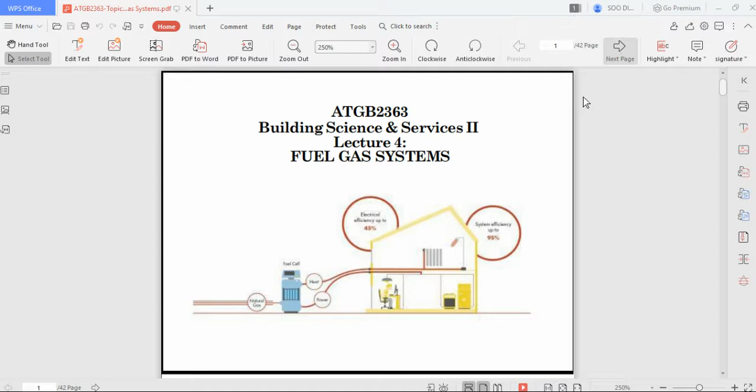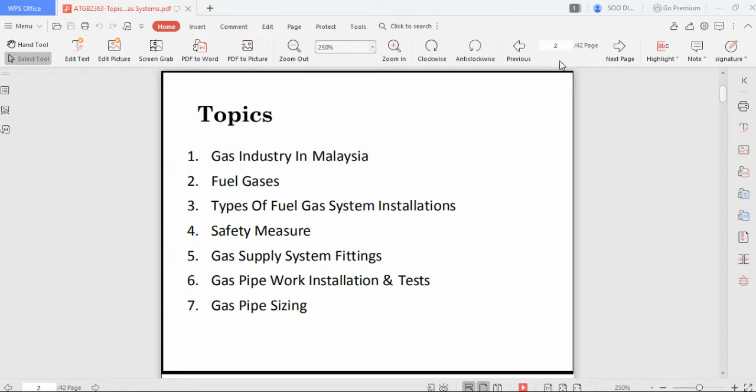Okay, so this is a fuel gas system. Previously we have gone through the gas industry in Malaysia one and two, which is a fuel gas. So today we will try to cover the whole topic. So this is our reference, our CLO, and then information on the gas industry. How is the gas industry like in Malaysia?

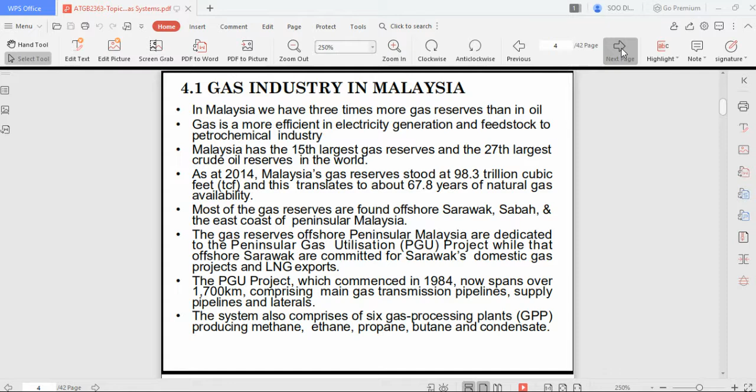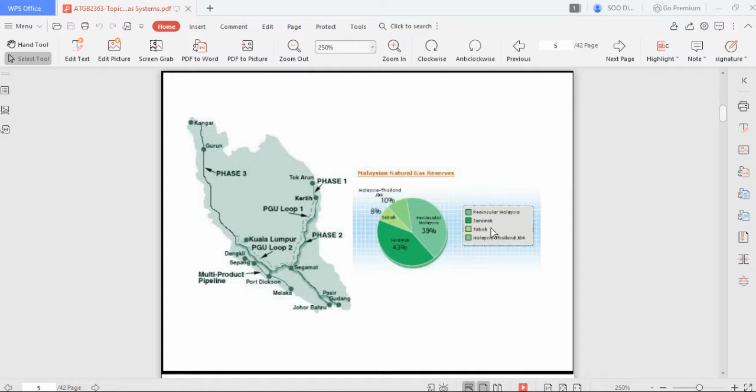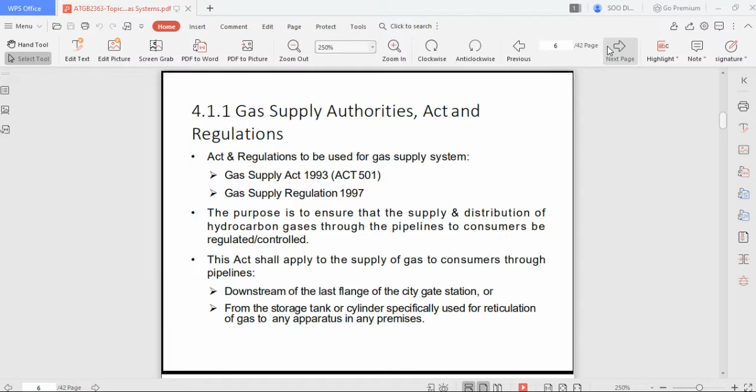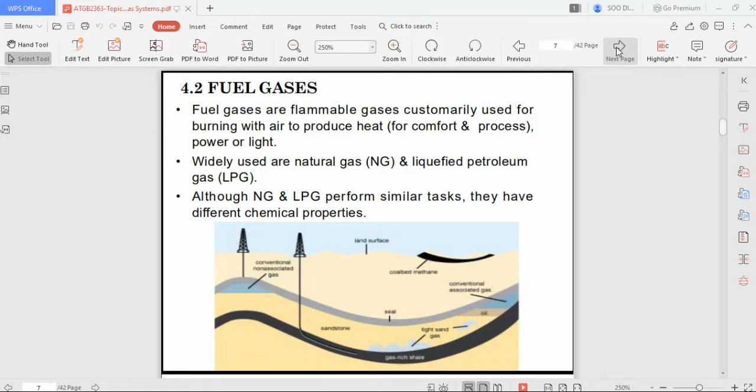So natural gas and liquefied petroleum gas, as I covered previously, in Malaysia we use it for cooking, and if there is some vehicle or engine that can utilize it, this is mostly on taxis. You have an NGV taxi with a sticker behind, and they'll have a tank in front of their car in which they can pump the natural gas. You do not have to take note of this one. This one, if you see it on the road,

let me show you quickly. It's rare in Malaysia, but mostly this is used by taxis. Not a lot of places offer a refill for natural gas. From what I know, it is mostly at Petronas. So the tank will be located in front. This is how they look. Mostly it will be used by taxis. So you can search. All of them, their tank is located in front of the car.

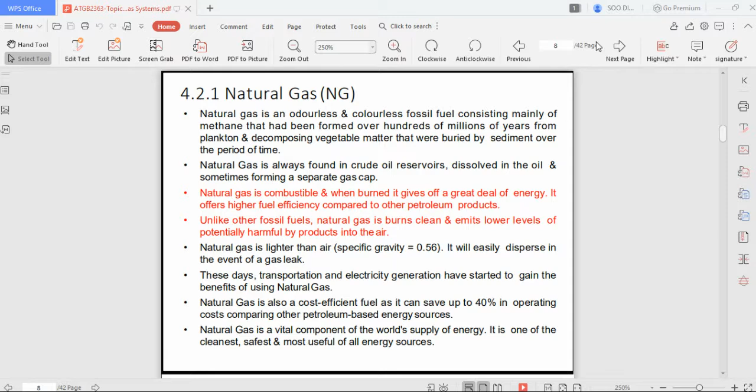Okay, one thing to note is natural gas is lighter than air, so there's not much danger. But liquefied petroleum gas is heavier than air, so if there's a leak, liquefied petroleum gas is more dangerous than natural gas, because there's a difference in the specific gravity because of the components inside. This is what differentiates natural gas and liquefied petroleum gas. And natural gas is more cost efficient compared to other petroleum based energy sources. And that's about it for the difference between natural gas and liquefied petroleum gas.

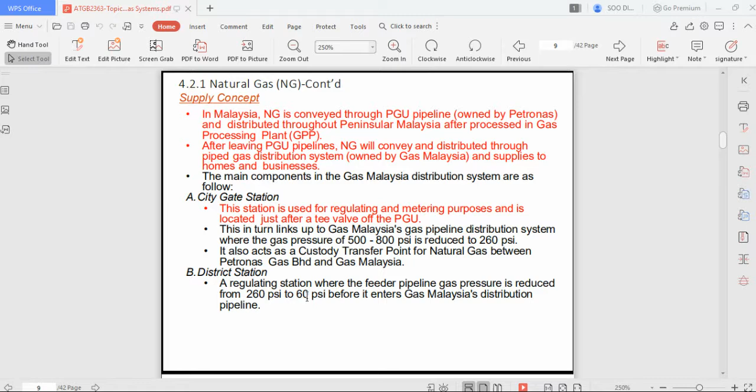One thing you notice with the five components is that at the city gate station, they are transporting it at a very high pressure, which is 500 to 800, and they are reducing it as it gets closer to the consumer. So from 800 to 260, from 260 to 60, then 60 to 4.3, and then at 4.3 it is given to the consumer.

So the idea behind why they want to transport it at a higher pressure is efficiency. You do not want to have a very small pipe supplying water to the consumer because it's inefficient. So like liquid and gas, you want to have a very big pipe so that you can transport more water, or in this case more gas, to the consumer. So this is the idea behind trying to transport it at a higher pressure.

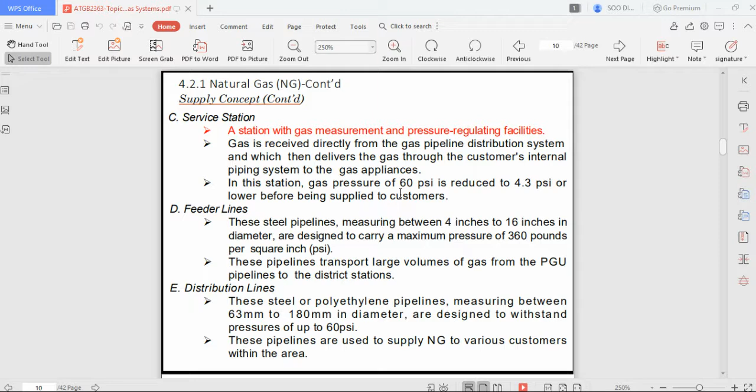So in gas, because it is able to float here and there, instead of using amount of water to measure, in gas you use pressure. So you try to pressurize the gas into some sort of like a liquid, and this way you'll be more storage efficient, which means you compress the gas into some sort of liquid gas state. This way you'll be able to transport more gas per area.

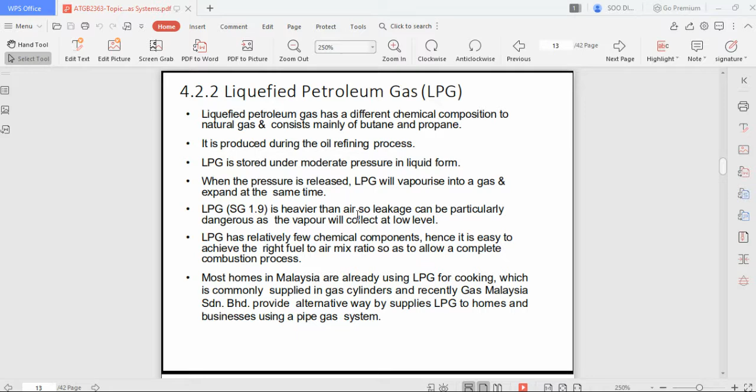So the specific gravity is heavier as compared to natural gas. So there will be a danger if it's leaking. If you see in a movie, people will try to suicide by opening this gas tank, and if they were to inhale it, then you will die lah. So not much different between the natural gas and the LPG. So this is the gas tank in which the LPG is being stored. We use it to do our cooking.

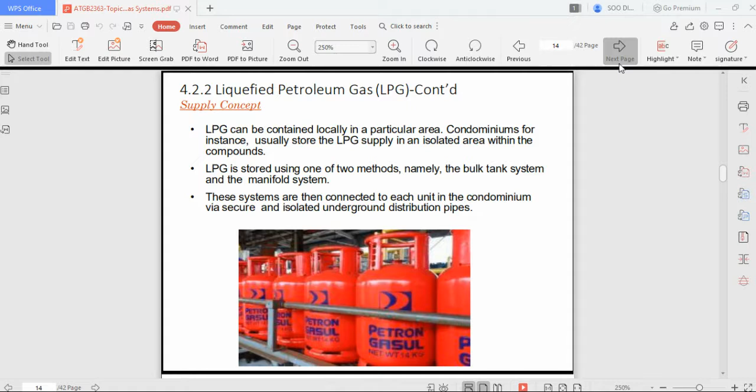As of now, most of our supply is from this, but in the US there are gas supply lines, done using underground distribution pipes. So each condo does not have to rely on this gas tank. They just open their valve, and just like water, they'll be able to get their natural gas or their LPG to do their cooking. So this is a distribution system for LPG.

So the advantage of using LPG or natural gas is all these burning appliances do not need much maintenance. You just need an outlet to release the heat or any cooking odour, and that's it lah. So it's a very simple system. And the last advantage of fuel gas: if you are using pipeline, then you don't have to allocate a space for your gas tank.

And if you're using natural gas, then it's a very clean burn. So there's not any ash or soot. So these are the few advantages of the fuel gases. So this is important lah. Make sure you remember this.

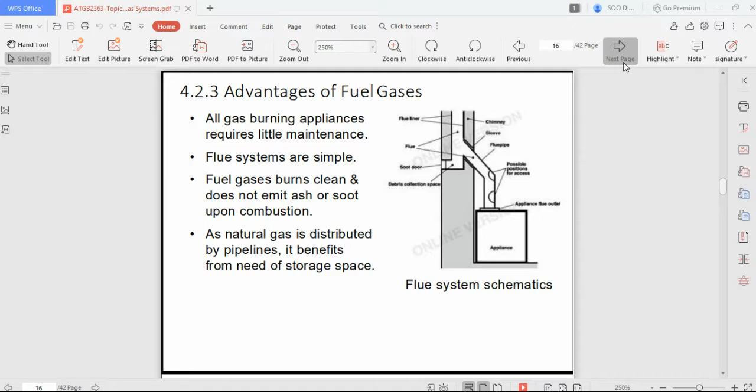Okay, the difference between natural gas and LPG. Flame temperature is the same, but natural gas and LPG require different storage. LPG requires storage space and frequent refill, meaning that LPG cannot be supplied by pipeline. Only NG can be supplied by pipeline, but NG can be supplied by tanker storage tank also. So one of the disadvantages of LPG is that you cannot supply it through pipeline.

Flammability, not much difference, but NG is more difficult to ignite if there's a leakage. And natural gas produces less carbon dioxide as compared to LPG. So it's a bit more environment friendly as compared to LPG, but that's not very important because both of them are also producing carbon dioxide.

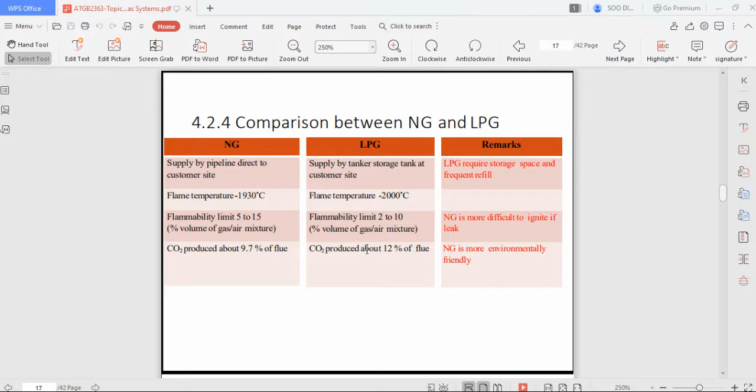Okay, so continue on. This is the new stuff lah. Previously I just did a summary of part 1 and 2. So this is the different types of how the fuel gas system can be installed. They can be done through bulk gas storage, the manifold gas system, or direct from pipeline. So there's 3 sorts of installation.

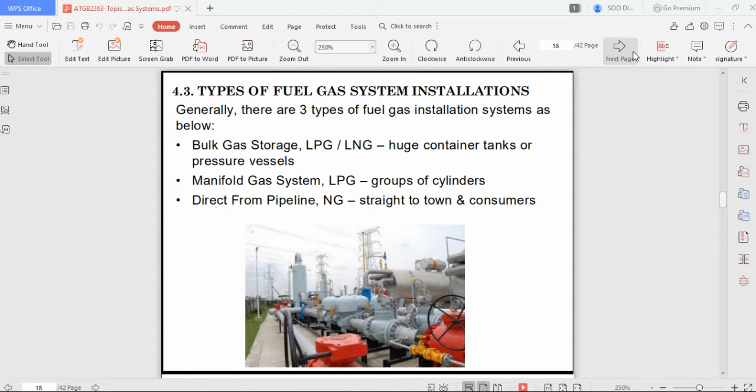So the first one is the bulk gas storage. A bulk gas storage is a big tank, either above ground or underground. If they are above ground, then they will have isolation valves and a stand, and there should be safety signage to show that this is flammable. And another thing that's not shown in this picture is there should be a shelter.

So you do not want to have this tank which has high pressure in direct sunlight. If you have direct sunlight on this tank which is filled with pressurized gas, worst come to worst, there will be a case of it exploding, and you do not want that to happen. So there should actually be a shelter, a warded off place, fencing, and a safety sign to say that

So they are constructed to ASME Boiler and Pressure Vessel Code, which means it's made to withstand very high pressure, because this is a gas, but if you're only using gas to store the energy, then it will not be very efficient, because once the gas is used up, then it will be used up very quickly. So we want to store the gas under pressure into liquid so that we can store more in the same area. So that's the reason why we use this.

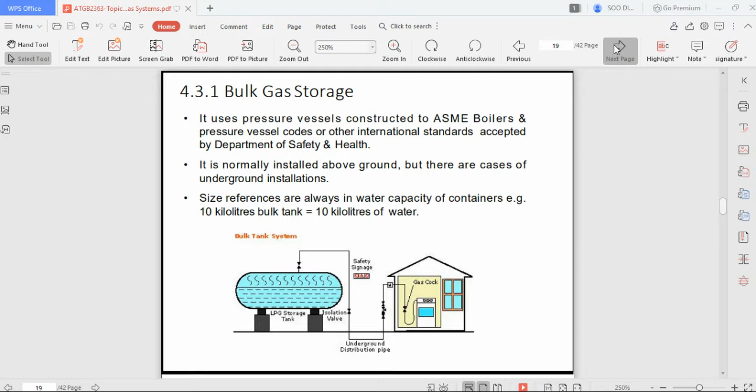So this is a bulk gas storage, and then the manifold gas system. So manifold gas system is cylindrical, and then the bulk gas storage is a pressurized big tank. So one thing to note, this is just for info, you are to install the cylinder not exceeding the safety distance stated in the relevant code of practice. Because there will be a lot of cylinders, you need to have a bit of distance between them, so you cannot just lump them all together. So this is just a code of practice on how the cylinders have to be stored.

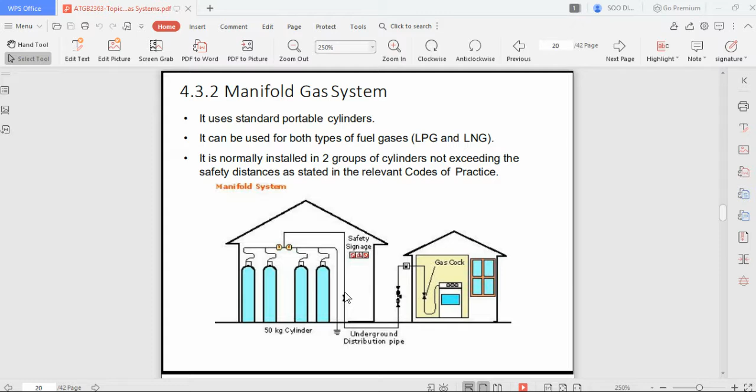Okay, the last is the direct from pipeline. So this is very direct, which means from the supply where the gas is being produced, it will be supplied at a very high pressure, and then as it moves towards the city to the consumer, the gas pressure will be lowered to a desirable pressure which we can use comfortably.

So for pipeline, naturally the best is we install it underground, so that it will not be unsightly to see all these pipelines here and there. For best practice, we want to install all these pipelines like our water, our sewage, even our telephone line or internet line underground to make our city look neat. So there will not be any wire on top of our view or on the ground. So that's why we want to have all our utilities inside the ground.

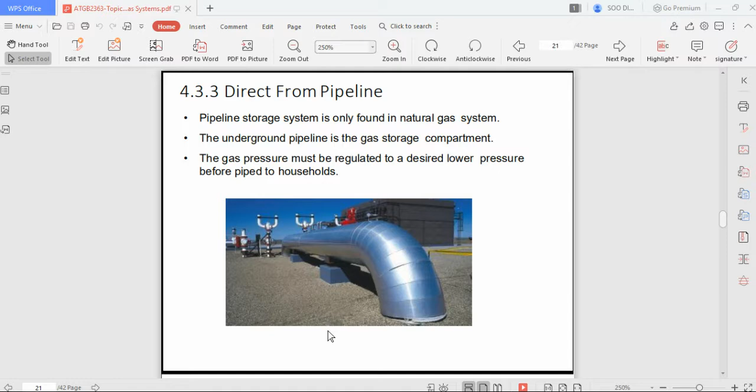Or underground pipeline. Okay. And then pressure is set in the bulk tank, and gas pressure must be lowered before being piped to the house. So this is a point form for bulk storage and the direct from pipeline, the comparison between the methods of supplying the natural gas and the LPG.

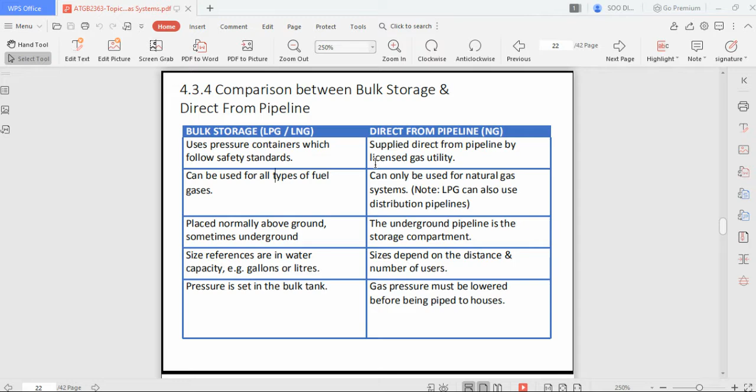Okay, so all said and done, one of the things that is very important for your exam: fuel gases in their natural states are odorless. So that's why they have to be odorized with an odorant compound, which is sulfur. Sulfur will give you a rotten egg smell. So once you smell a rotten egg smell, you know that your gas is leaking. Because all these fuel gases are used to cook, and in their natural state, they are odorless.

And the problem is if you breathe it in, or you have your gas in an enclosed room, because it's pressurized, it can easily fill up your whole room with these gases. And these gases are dangerous in the sense that if your room is enclosed and the fuel gas is leaking and it reaches a high level, then it will actually kill you because of the chemical buildup. Instead of our body consuming the oxygen, the fuel gas will fuse into our body and then it will kill us. So odorants are put in as a safety measure.

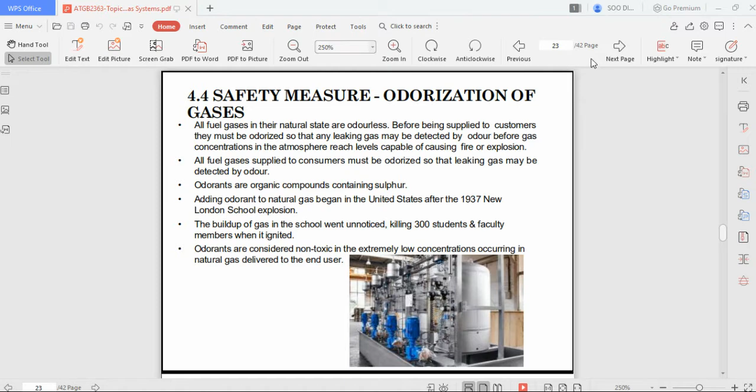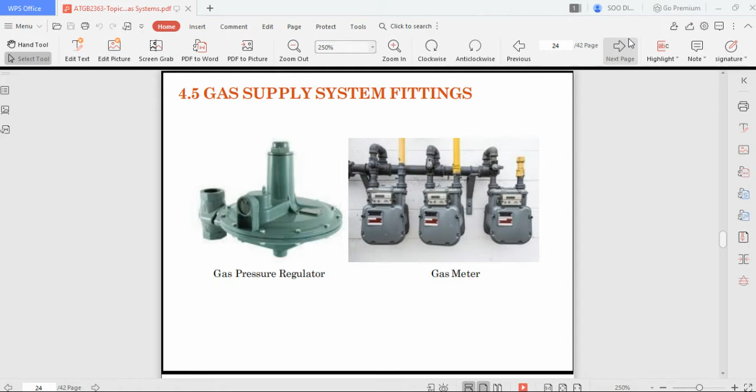And then the next is the gas supply system fitting. So we'll finish this and then we go for a short break. Okay, so a gas pressure regulator. So this is important.

This is so important. The purpose of a gas pressure regulator is to maintain a constant downstream gas pressure by reducing the upstream or inlet pressure to a desirable downstream pressure. So as the name indicates, a gas pressure regulator is to regulate the pressure from upstream to the end user. So this gas pressure regulator, the function is to maintain a constant pressure regardless of the changes in gas

from the upstream pressure. Then there are three main components on how it works, the first is the loading element. So the loading element is a spring. So depending on how high the supply pressure is, this spring will regulate and give a constant pressure on the supply to the end user. So this is the loading element, which controls the pressure from upstream to downstream.

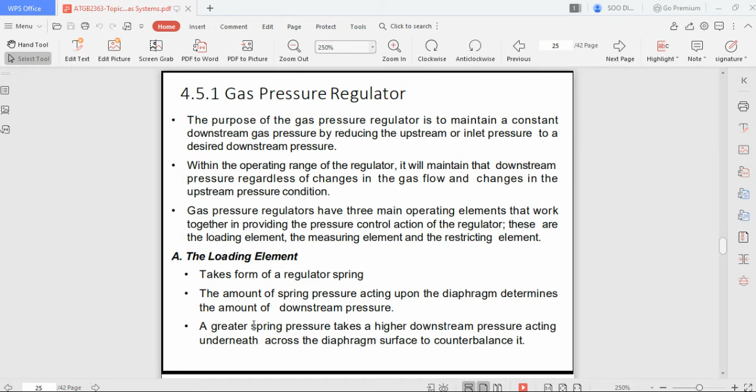So if there is a very high pressure from the upstream, then this spring, this loading element, will counteract to ensure that there's a constant supply. So this is a long explanation. And then there's a B and C.

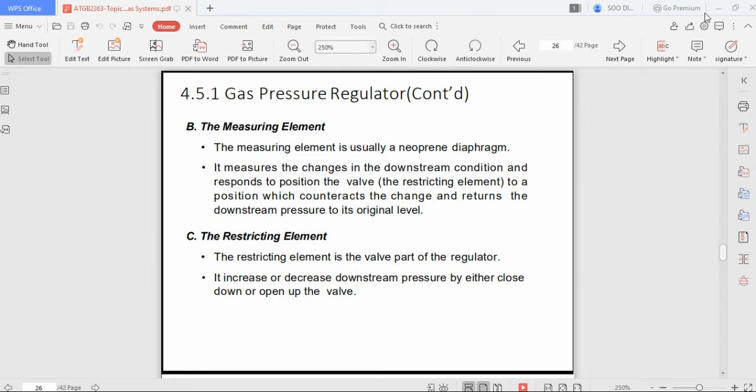So all these three are working together to ensure that you have a constant stream of gas at the end user level or at the consumer level. So without any one of these, you will not be getting a constant stream of pressure, which is bad for the consumer. You do not want to suddenly be cooking halfway and then there's an inrush of gas from the supply, and then the fire will explode in your face, which is not something you want to supply to your consumer or end user.

So that's why this is in place, but we don't have it all around Malaysia yet. But in the US, where they have gas supply lines to homes, they will have this regulating component in. So all of these are working together to ensure that the end user has a constant stream of gas. So if any one of these has a problem, then this whole thing has to be replaced, because it won't be able to allow for a constant stream of gas.

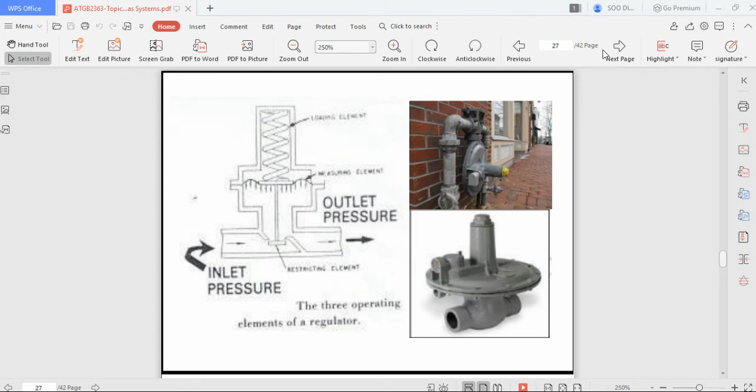Okay, so this will finish this part, and then we'll go for a short break. So the last part is the gas meter. This is used to measure and record the gas flow in both domestic and commercial appliances. So this is for the supplier to tax the consumer on how much gas they use. So after the gas passes by this regulator, there will be this gas meter, which will measure how much gas is being used by the consumer.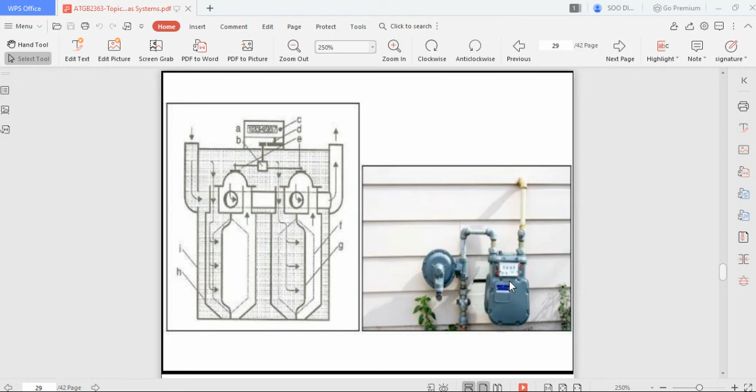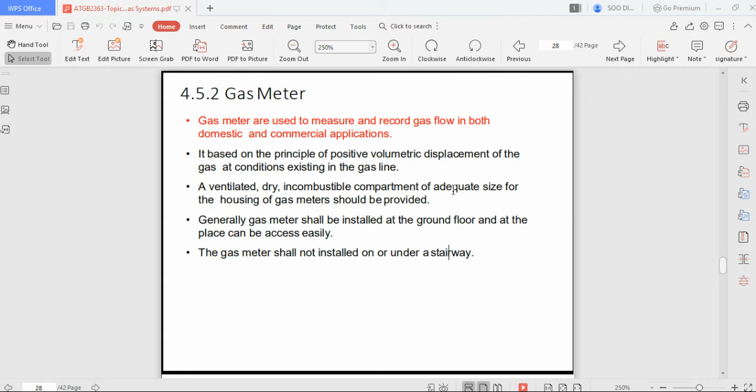So this is a schematic of it. Usually this is positioned outside the house, sort of like our TNB supply. There will be a meter. Generally the gas meter is installed at the ground floor where it's easily accessible. So it's not installed under a staircase, and you want to put it at a dry place. So that's about it for the first part.